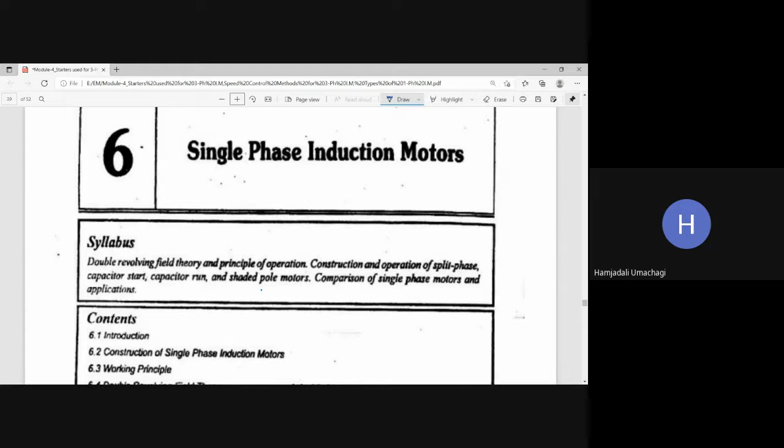Okay, so this is also the same induction motor which is working on the principle of mutual induction only. Instead of three phases it will be having single phase. This is the only difference. And rating wise, application wise, this will be used for small domestic rating applications. Okay, now let us see the things related to single phase induction motor.

So in this class I will just brief out the introduction, construction, working of single phase induction motor, and why it is not self starting, based on double revolving theory, because already I have covered the double revolving theory concept before this. Okay, now let us see the introduction related to single phase induction motor.

For general lighting purpose in shops, offices, houses, schools, etc., single phase AC supply is commonly used. Hence, instead of DC motors, the motors which work on single phase AC supply are popularly in use. These motors are called single phase induction motors. Numerous domestic applications use single phase induction motors. The power rating of such motors is very small.

Some of them are even fractional horsepower motors, which are used in applications like small toys, small fans, hair dryers, etc. This chapter explains the construction, working, and applications of various types of single phase induction motors. So, usually, wherever you take domestic applications like schools, offices, colleges, there we are going to make use of single phase AC supply.

And since single phase AC supply is easily available, instead of making use of DC motors, we are going to make use of AC motors, that too of single phase. So if the induction motor is made to operate on single phase AC supply, then that type of AC motor we call a single phase induction motor.

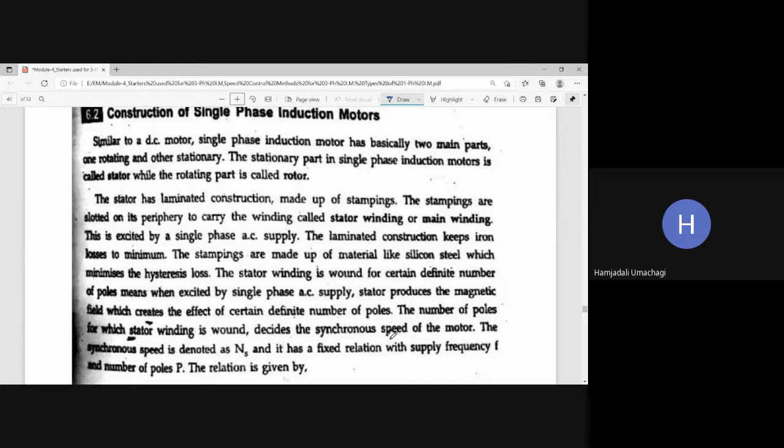Because of that, based on that only we can judge the speed, that is nothing but the synchronous speed of the single phase induction motor. The synchronous speed is denoted as Ns, and it has a fixed relation with supply frequency and number of poles. So based on the number of stator poles, we can decide the synchronous speed of the single phase induction motor, given by the formula Ns = 120f/P rpm. This is already known to you.

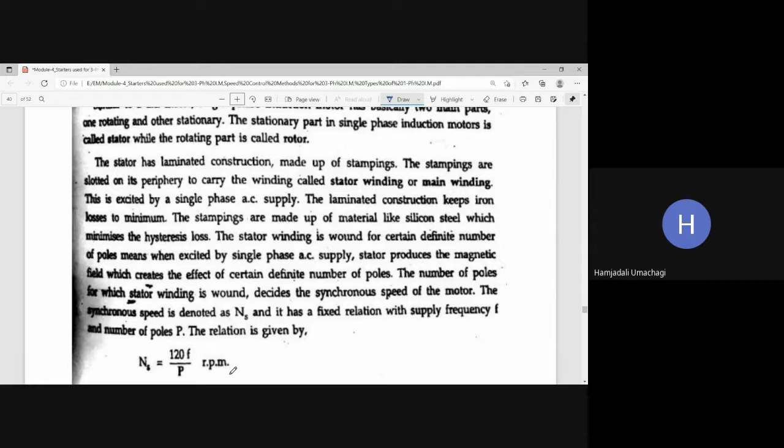Okay, the induction motor never rotates with synchronous speed, but rotates at a speed which is slightly less than synchronous speed. This is already known, that this induction motor will never run at a speed equal to the synchronous speed. It will always be running at a speed less than synchronous speed.

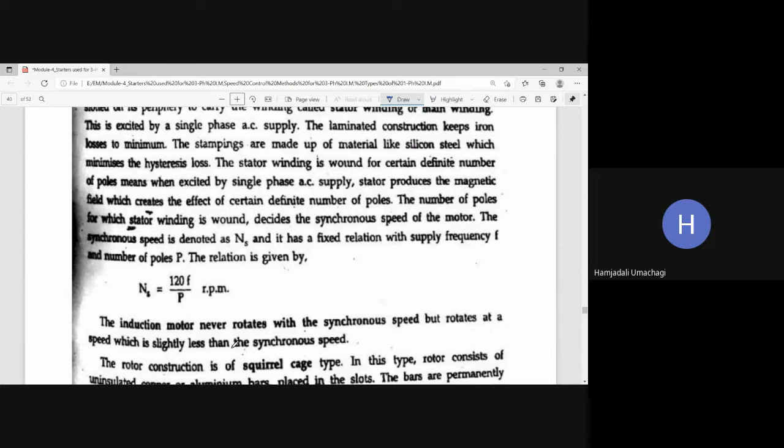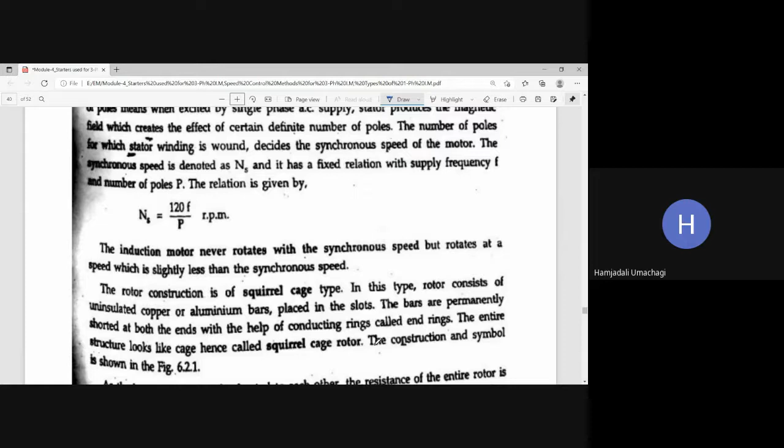Okay, the rotor construction of squirrel cage type. In this type, the rotor consists of uninsulated copper or aluminum bars placed in the slots. These bars are permanently shorted at both ends with the help of conducting rings. They are called end rings. The entire structure looks like a cage, hence it is called squirrel cage rotor. The construction and symbol for this is shown in figure 6.2.1.

As the bars are permanently shorted to each other, the resistance of the entire rotor is very, very small. The air gap between the stator and rotor is kept uniform and as small as possible. The main feature of this rotor is that it automatically adjusts itself for the same number of poles as that of the stator winding.

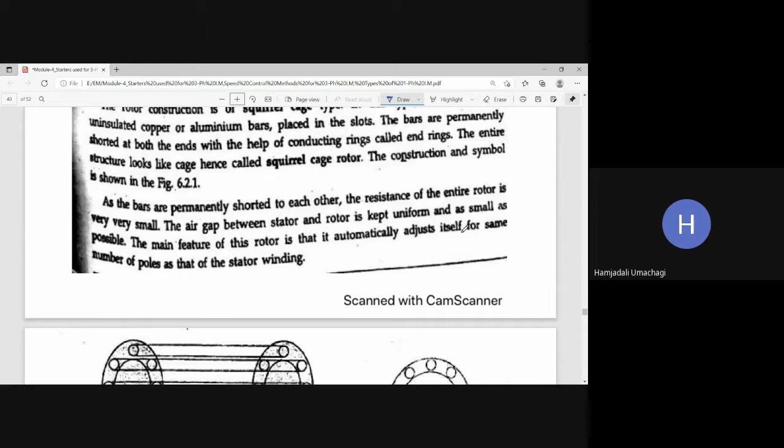So here, the stator is having the stator poles and it is going to carry the main winding, to which we give the power supply to get the stator flux. Coming to the rotor part, the rotor here is made up of a construction like a squirrel cage. This rotor is having uninsulated copper or aluminum bars, and on both sides it is shorted by the conducting end rings, and this structure looks like the cage of a squirrel. Because of that, we call this a squirrel cage induction motor.

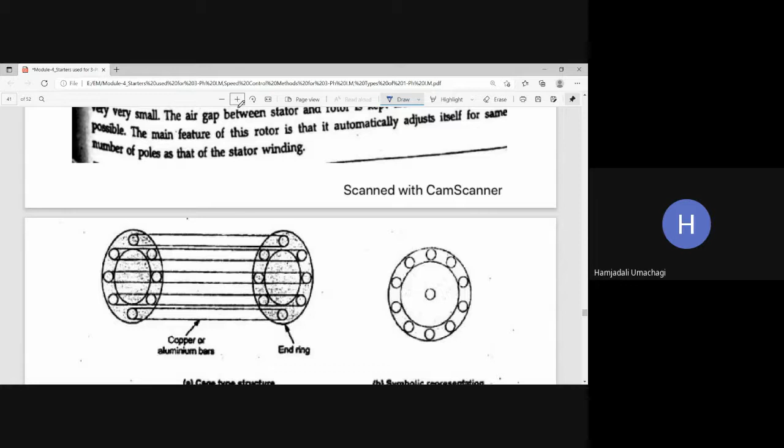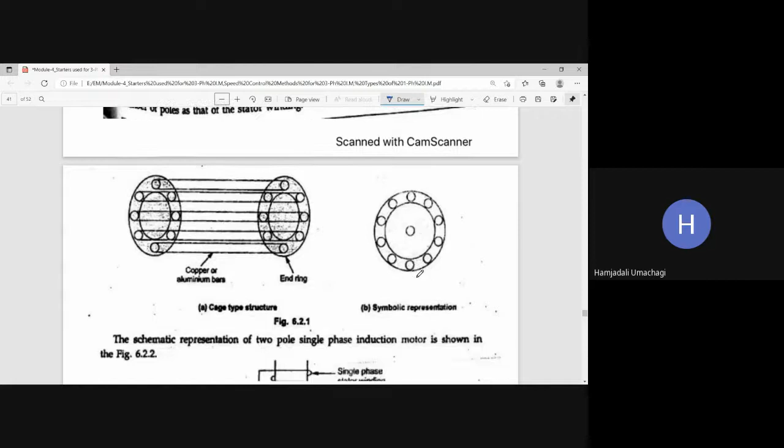Okay, so this is the rotor of the squirrel cage induction motor, and this is the symbolic representation of the squirrel cage rotor. Then the schematic representation of the two-pole single-phase induction motor is as shown in figure 6.2.2. So this is the schematic representation of the two-pole single-phase induction motor.

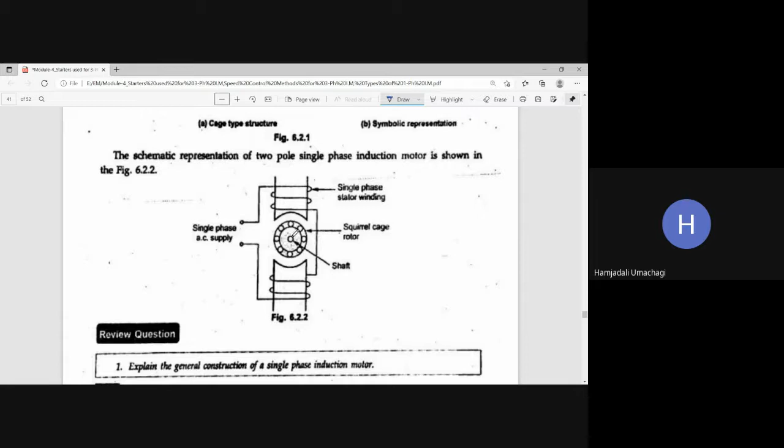So this is the stator having two poles onto which we are going to wind the single-phase stator winding, that is the main winding, and this is the rotor, that is squirrel cage, and this is the shaft. So this is the schematic representation of the single-phase squirrel cage induction motor. Okay, so this is all about construction of the single phase induction motor.

Now let us see the working principle, how the single phase induction motor is working. For the motoring action, there must be two fluxes which interact with each other to produce the torque. So always, if we want motor action, there should be rotation. So to get the rotation, what should be there? There should be two fluxes.

One flux is because of the stator winding, the other flux because of the rotor winding. When these two fluxes interact with each other, the torque will be in one particular direction. It will be unidirectional, and based on that direction the induction motor will be rotating. Okay, this is the well-known concept. Now let us see the working principle for the single phase induction motor. For the motoring action, there must exist two fluxes which interact with each other to produce the torque.

In DC motors, the field winding produces the main flux, while the DC supply given to the armature is responsible to produce armature flux. If you take DC motors, they will be having two windings. The field winding is going to produce main flux, while when DC supply is given to the armature, it is going to produce the armature flux. So this armature flux and main flux both will interact with each other to produce the torque in the case of a DC motor. Because of that, the DC motor will start to rotate in one particular direction, either clockwise or anti-clockwise.

Okay, but in the case of the single phase induction motor, single phase AC supply is given to the stator winding. The stator winding carries an alternating current which produces a flux which is also alternating in nature.

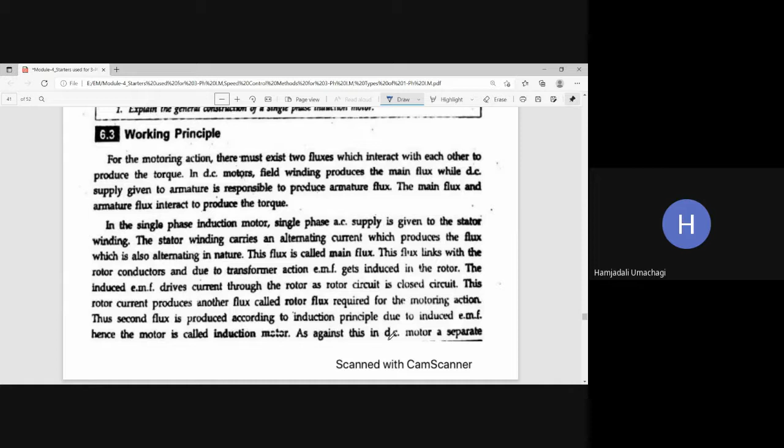So this second flux, the rotor flux, is produced because of the induction principle, from the stator, to the air gap, then to the rotor. The EMF is induced. Because of that induction, this single phase AC machine is called an induction motor. As against this, in a DC motor, a separate supply is required to the armature to produce the armature flux. So if you consider a DC motor, we have to give a separate supply to the armature winding for producing the armature flux, but it is not so in the case of the AC single phase induction motor.

So whatever flux is generated in the stator, via the air gap, it is going to link with the rotor. Because of the transformer action, rotor EMF will be induced. As the circuit is closed, rotor current will start to flow, then rotor flux is available. So this all happens because of the mutual induction process. Because of that, this is called a single phase induction motor. Okay.

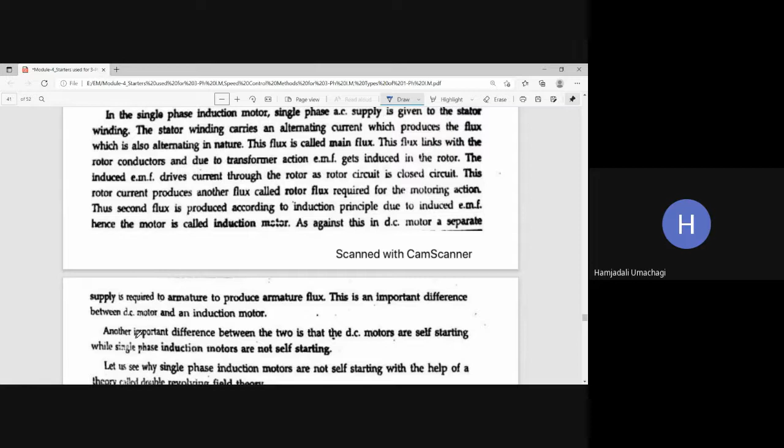Another important difference between the two is that DC motors are self-starting while single-phase induction motors are not self-starting. So DC motors are self-starting, but this single phase induction motor is not self-starting. Why is it not self-starting? Already I have explained you based on the double revolving field theory. What does this double revolving field theory suggest?

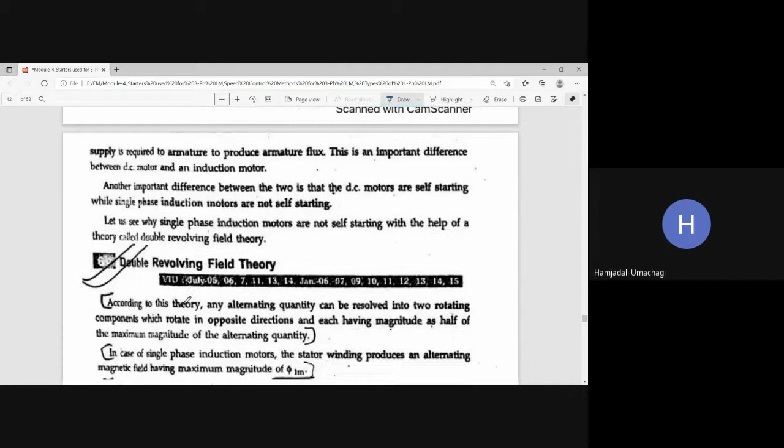This double revolving field theory suggests that the stator flux, whatever we are getting in the beginning in the stator winding, that is the main flux, is alternating in nature. Because of this alternating nature, the main flux is divided into two components: one component in the forward direction, that is phi f, and another component in the backward direction, that is phi b.

And now these two components, which have equal magnitude but opposite direction, because of the transformer action or mutual induction, are going to produce one more flux in the rotor. And now these two fluxes interact with each other and they are going to produce the torque. But see that the rotor is not rotating.

Why? Because the net torque experienced by the rotor is zero, because the flux produced by the stator has two components, one in the forward direction, the other in the backward direction, with equal magnitude and opposite direction. Because of that, the net torque experienced by the motor is zero at the time of starting. Because of that, the induction motor fails to run on its own at the time of starting.

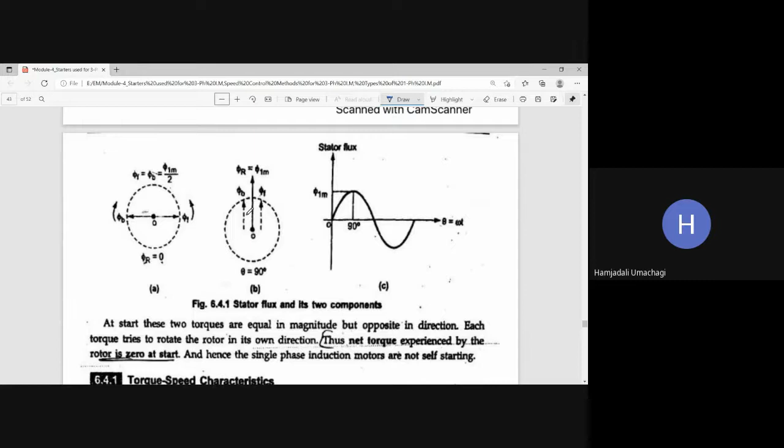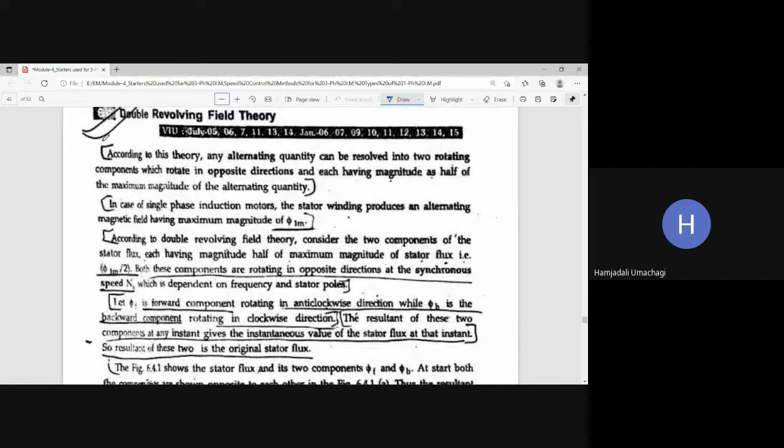So this is all we have seen in previous classes, where I have explained double revolving field theory. This double revolving field theory is going to be asked repeatedly in the final VTU exam. It is one of the important questions they may ask in the final VTU exam. And I have also told you what all things you are supposed to write: all this theory part, then all this flux distribution, then these diagrams, then this torque speed characteristics.

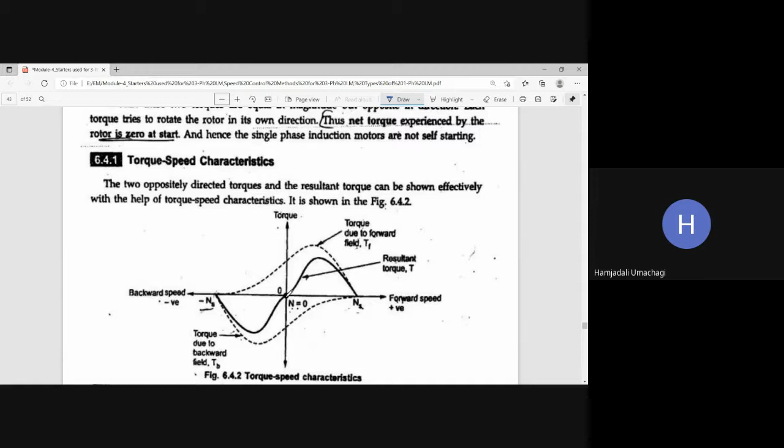All these things explain why single phase induction motors are not self starting. If you see this torque speed characteristics, this is the torque because of the forward component, and this is the torque because of the backward component, and the resultant torque at the origin is zero. Because of that, the net torque experienced by the motor is zero, so there is no force for the rotation of the motor. If there is no force, the motor fails to run. So the net torque experienced by the induction motor at the time of starting is zero.

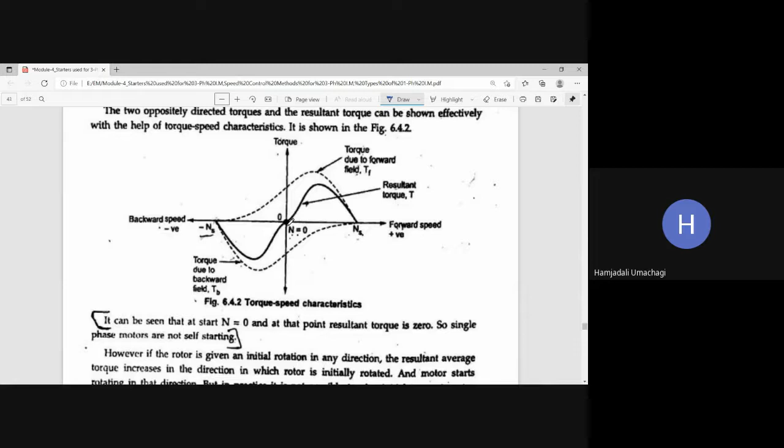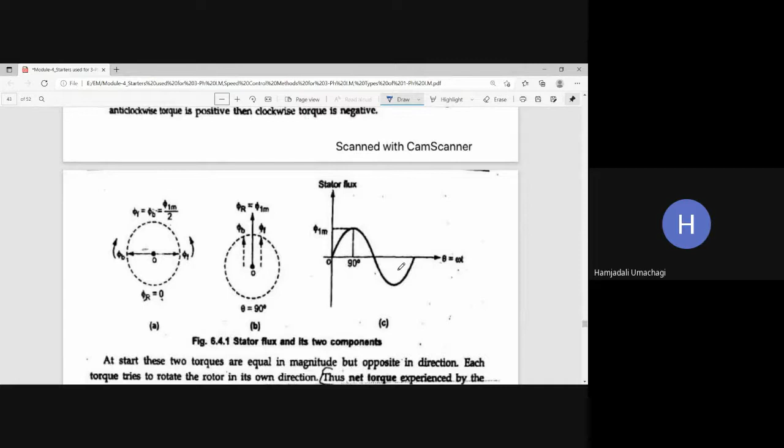The stator flux is divided into two components, one acting in the forward direction, the other acting in the backward direction. Both are equal and opposite, and alternating in nature. Now this alternating stator flux we are going to make rotating in nature. To convert from alternating to rotating, there are different techniques we are going to see, and based on that conversion there are different types of single phase induction motor. Now let us see.

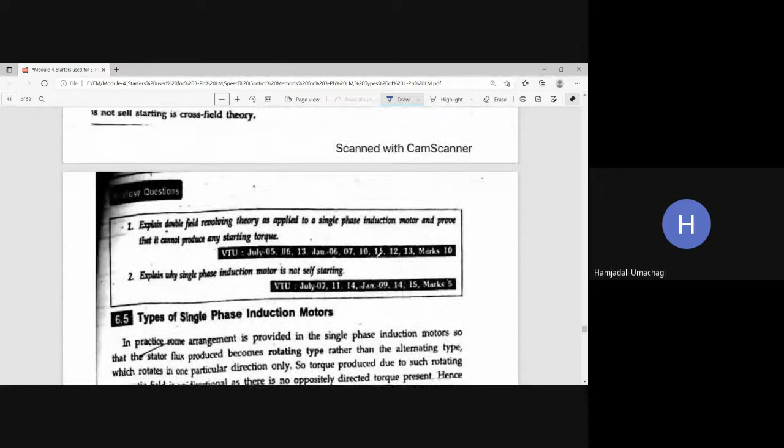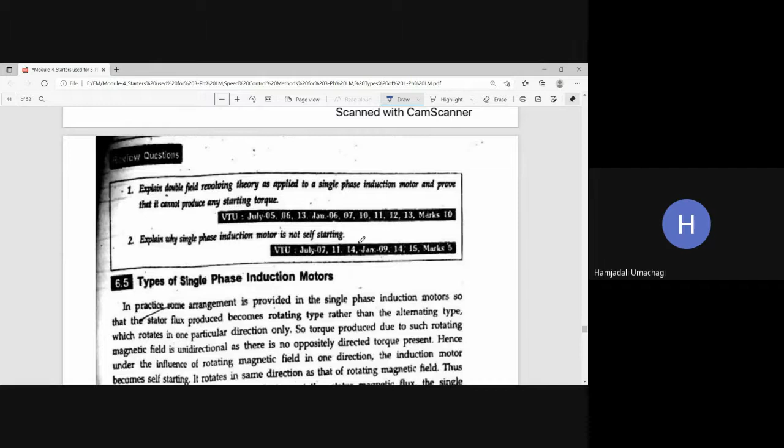So this is the question they may ask: why single phase induction motor is not self starting, or a question based on double revolving field theory. You can see how many times this question has been asked. Okay, now let us see the different types of single phase induction motor.

Types of single phase induction motor. In practice, some arrangement is provided in the single phase induction motor so that the stator flux produced becomes rotating type rather than alternating type. Since the stator flux is alternating type, single phase induction motors are not self starting, so we need to convert this alternating stator flux to rotating type. So some modifications from the design point of view we have to do, so that it rotates in one particular direction only. So torque produced due to such a rotating magnetic field is unidirectional, as there is no oppositely directed torque present.

If we convert the stator flux from alternating to rotating, torque will be only in one particular direction, whereas if it is alternating, half of the component will be in the forward direction and half in the backward direction with equal magnitude and opposite direction. Because of that, net torque will be zero and the motor fails to run. But if it is rotating, it will have unidirectional torque, with no other torque opposing it. So the motor can start on its own in one particular direction if the stator flux is made rotating type.

Hence, under the influence of the rotating magnetic field in one direction, the induction motor becomes self-starting. If the stator flux is converted from alternating to a rotating magnetic field, the induction motor can very easily start on its own. It rotates in the same direction as the rotating magnetic field. Thus, depending upon the methods of producing rotating stator magnetic flux, single phase induction motors are classified.

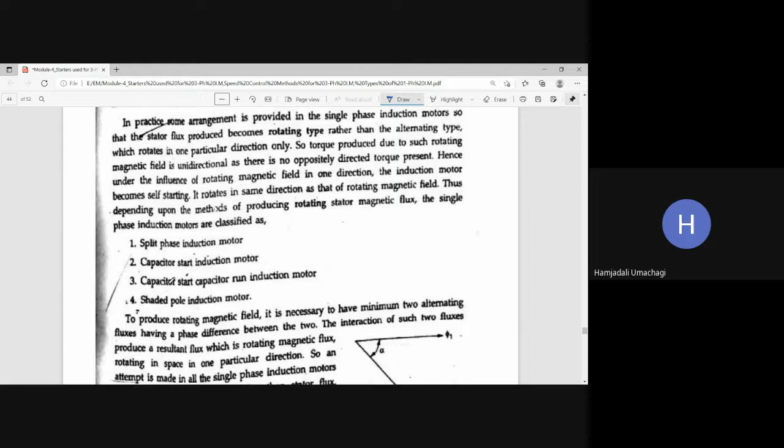Okay, so now you can see here, to produce the rotating magnetic field, it is necessary to have a minimum of two alternating fluxes which have a phase difference between the two. So always we know that for the torque to be there, there should be the interaction of the two fluxes. One flux is stator flux, the other is the rotor flux, and both these two fluxes should have the phase shift. If they have phase shift, then alternating flux can be converted into rotating flux. So how to provide this phase shift alpha?

So providing this phase shift alpha between the two fluxes is what all the different types of single phase induction motors do. So in the main exam, out of the four, any one of the motors will be compulsorily asked for 5 to 6 to 8 marks, like the question: with a neat sketch explain the construction, working, applications, advantages and disadvantages of split phase induction motor, or capacitor start capacitor run induction motor, or shaded pole induction motor. Any of the motors they may ask. So whenever they ask a particular motor, that particular description you are supposed to write in the final VTU exam.

So now for producing the rotating torque, there should be two fluxes having the phase shift of alpha. So how to provide this phase shift alpha between the two fluxes phi 1 and phi 2? Phi 1 means stator flux, phi 2 means rotor flux here. Now let us see the description for this.

Okay, to produce the rotating magnetic field, it is necessary to have a minimum of two alternating fluxes having the phase difference between the two. The interaction of such two fluxes produces a resultant flux which is a rotating magnetic flux. So whenever these two fluxes have a phase shift of alpha, the alternating flux is converted into rotating magnetic flux, rotating in space in one particular direction. So an attempt is made in all the single phase induction motors to produce an additional flux other than stator flux. So here we are going to make some alterations.

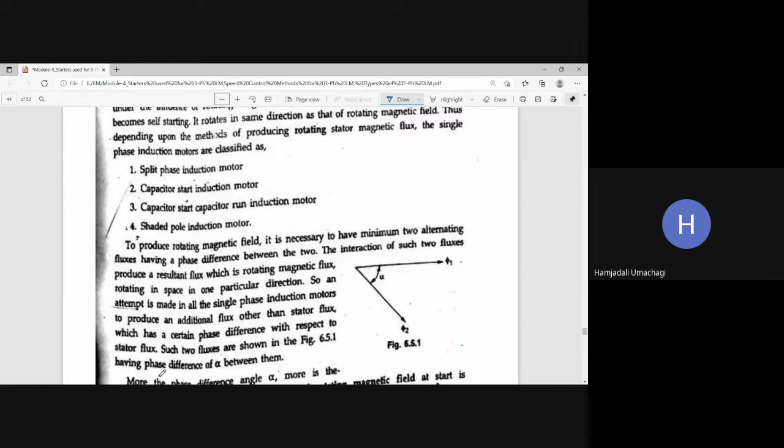So the additional flux is this phi 2, which we are going to provide in the single phase induction motor to make the single phase induction motor start on its own, which has a certain phase difference with respect to the stator flux. Stator flux is phi 1 here. Such two fluxes are shown in figure 6.5.1, having a phase difference of alpha between them. So these are the two fluxes, phi 1 and phi 2. Phi 1 is the stator flux and phi 2 is the additional flux, and in between them the phase shift is angle alpha.

The more the phase angle difference alpha, the more is the starting torque produced. So the more the angle between phi 1 and phi 2, the more will be the starting torque Tst. Thus production of rotating magnetic field at start is important to make the single phase induction motor self starting. So if there is an alpha between the two fluxes, then torque produced will be in one particular direction, and because of that the motor will start on its own. Once the motor starts, the other flux phi 2 may be removed and the motor can continue to rotate under the influence of the stator flux or the main flux alone.

So the very best example of this single phase induction motor is the ceiling fan. In the ceiling fan, if you observe, there is a capacitor connected. That capacitor serves many functions. First, since the ceiling fan is a single phase induction motor, the capacitor is going to improve the power factor. Other than improving the power factor, it makes the ceiling fan start on its own. If there is no capacitor, then the ceiling fan will not start because of alternating flux. So that alternating flux is converted to rotating flux by adding the capacitor, which provides the phase shift alpha.

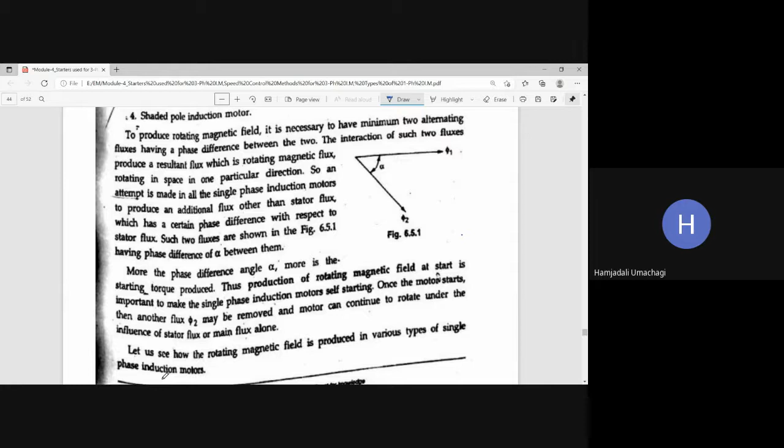Once the motor starts, then another flux phi 2 may be removed and the motor can continue to rotate under the influence of stator or main flux alone. So once the motor starts on its own, then flux phi 2 can be removed. Okay, let us see how the rotating magnetic field is produced in various types of single phase induction motors, how they are made to rotate on their own by producing the rotating magnetic field.

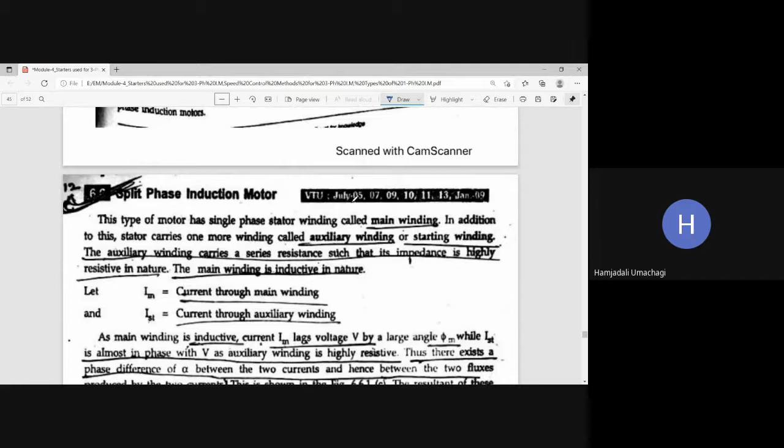So out of the four, the first one is split phase induction motor. This I have already covered in the previous class. This is also one of the important questions. So you can see how many times this question has appeared. The question will be like, with a neat sketch explain the construction and working of split phase induction motor. Then you are supposed to explain all this description here.

So in between Im and Ist, or phi 1 and phi 2, the phase shift angle is alpha, because the starting winding is resistive in nature and the main winding is inductive in nature. Because of this, there exists a phase shift of alpha between Ist and Im. And because of this alpha only, we can convert alternating stator flux to rotating flux. The starting current Ist is resistive in nature, so it is almost in phase with the voltage. This I have already covered in the earlier class.

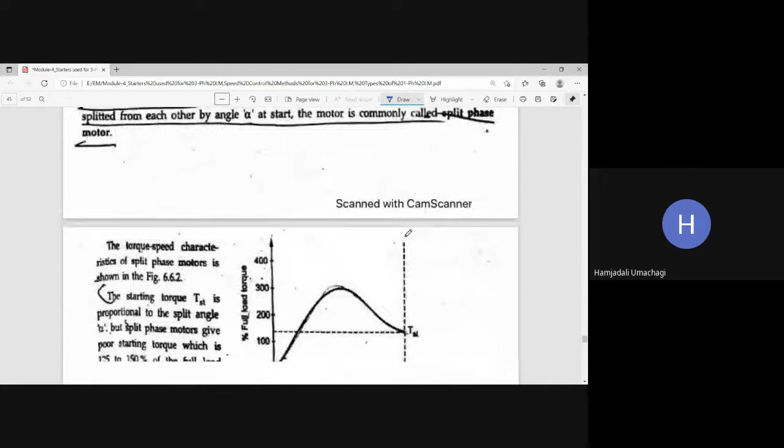So once it starts on its own, the centrifugal switch is opened, then flux phi 2, the flux available because of the starting current, is taken out, and the motor can run very easily once it picks up the speed. So this is all about the split phase induction motor, and the torque versus speed characteristics and the applications. This is the type of question you may get in the final VTU exam. Okay, so now we will see the description for capacitor start induction motor.

A very good example is the ceiling fan, where the ceiling fan is a single phase induction motor and it has a capacitor. The capacitor serves two purposes, as I have told you. One, it improves the power factor of the circuit. Why? Because an induction motor is an inductive load. And also it makes the ceiling fan start on its own. So you can see how many times this question has been asked.

Capacitor start induction motor. Let us see the construction description. This type of motor is similar to the resistance split phase type. The difference is that the capacitor is connected in series with the auxiliary winding. The capacitive circuit draws a leading current. This feature is used in this type to increase the split phase angle between the two currents Im and Ist.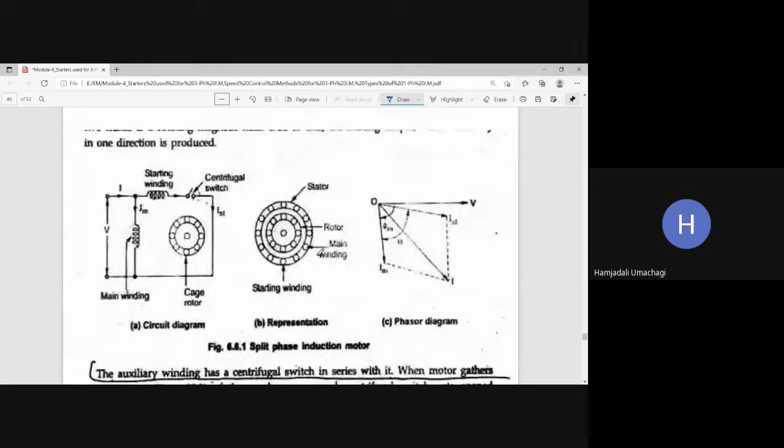So if you see the split phase induction motor here, this split phase induction motor has a resistive starting winding with current Ist, and an inductive main winding, the stator winding. Ist is the current flowing through the starting winding, and the current flowing through the main winding is Im. In between these two there is an angle alpha.

So now further, with the same circuit diagram, if we add one more additional capacitor to the split phase induction motor, then it is called a capacitor start induction motor. We all know that in a capacitor circuit, current always leads the voltage. So now what is the current here? The current in this case is Ist.

Because of that, the current Ist, which was earlier at this position, now leads the voltage. This is the voltage phasor, and now this current Ist gets shifted to here. Because of that, the phase angle between Im and Ist further increases. Alpha further increases in comparison with the normal split phase induction motor.

So this capacitor start induction motor is as good as a split phase induction motor with the only addition of a capacitor in series with the starting winding, and the starting winding is resistive in nature. Because of that, the starting current Ist leads the voltage. Because of the capacitive current, Ist leads the voltage, and the earlier position of Ist at this position now gets shifted to this position.

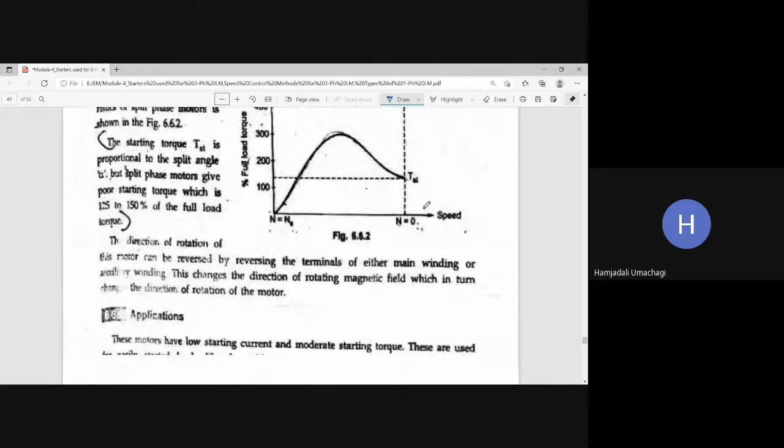Because of that, alpha, which was earlier only this much, has now been improved. Because alpha has increased, torque automatically also increases. The construction of this type of motor is similar to the resistance split phase type. The difference is that the capacitor is connected in series with the auxiliary winding. The capacitor draws the leading current Ist. This feature is used in this type to increase the split phase angle alpha between the two currents, main current Im

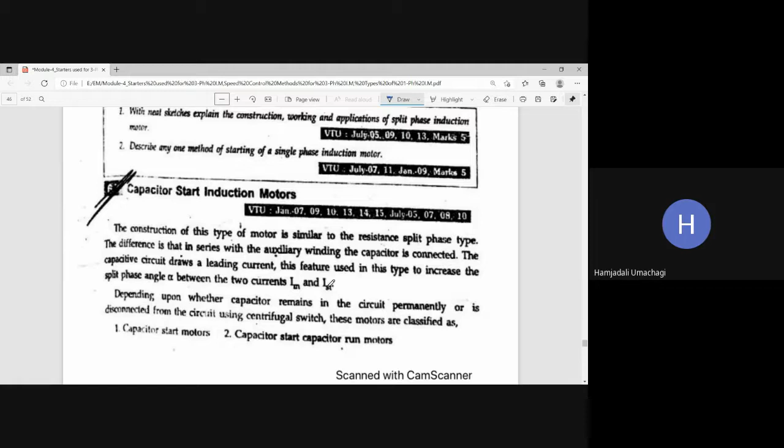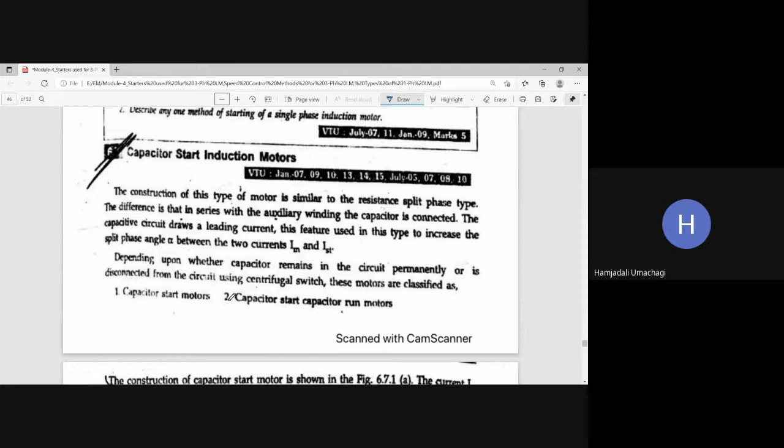and starting current Ist. Depending upon whether the capacitor remains in the circuit permanently or is disconnected from the circuit using the centrifugal switch once the motor picks up speed, these motors are further classified as capacitor start motor and capacitor start capacitor run motor. Now let us see the first one.

So this is the circuit diagram for the capacitor start motor. Everything is the same as the normal split phase induction motor: it has an inductive main winding, that is the stator winding, and a resistive starting winding with starting current Ist. In addition, you have this capacitor, and the centrifugal switch is common. The starting current Ist was earlier at this position, but now it has been shifted so that Ist leads the voltage.

Because of that, the angle alpha between Im and Ist is larger. This is Im, the inductive current flowing through the stator winding, and this is Ist, the current flowing through the resistive starting winding, which, because of the leading current, shifts so that Ist leads the voltage. The angle between Ist and Im is alpha. So here the phase shift has been improved. If the phase shift angle is more, then torque is also more. Because of that, the induction motor will start on its own.

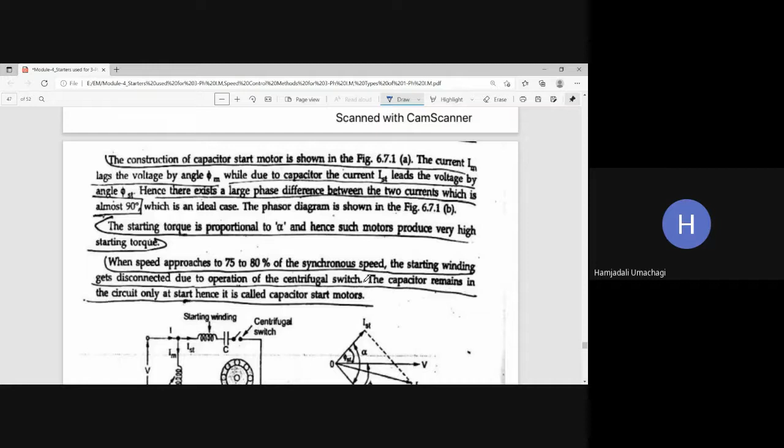The construction of the capacitor start motor is shown in figure 6.7.1a. This figure represents the capacitor start motor, and this is the phasor diagram representing the position of the starting current, main winding current, total current, voltage, and the phase angles alpha, phi st and phi m. The current Im lags the voltage by an angle phi m.

So this current Im is the main winding current flowing through the stator inductive winding, and it lags the supply voltage V. So this main winding current is inductive in nature, and it lags the supply voltage V here by an angle phi m. So the angle between voltage V and Im is this angle phi m.

Similarly, due to the capacitor, the current IST leads the voltage by an angle of phi st. So here the capacitor is connected in the starting winding. Because of that, the current flowing through the capacitor is IST, and it will be a leading current. So current IST is leading the supply voltage V, and the angle between IST and V is phi st. Hence there exists a large phase difference between the two currents, which is almost 90 degrees.

So now if you see the phase shift between IST and IM, that is alpha, it is almost 90 degrees. It is a very large angle, which is an ideal case. The phasor diagram is shown in figure 6.7.1b. This phasor diagram represents the position of IST, total current I, main winding current IM, supply voltage V, phase shift angle alpha, starting power factor angle phi st, and main winding power factor angle phi m.

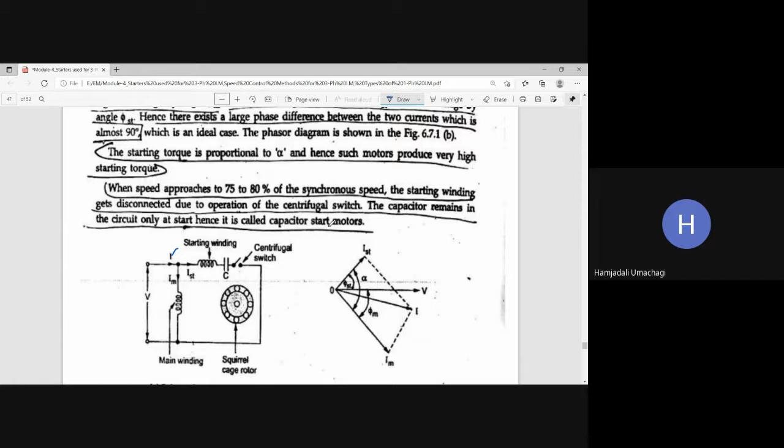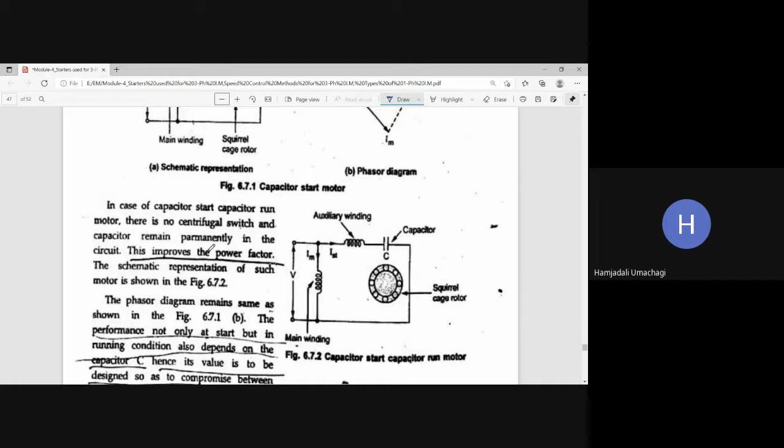Then, capacitor start, capacitor run. Now let us see the capacitor start, capacitor run motor. In this motor there is no centrifugal switch and the capacitor remains permanently in the circuit. So the only difference is that there is no centrifugal switch. The centrifugal switch will not be here; it will be completely shorted.

So there will be a capacitor at the time of starting, as well as in the circuit during normal working condition. Then it is called a capacitor start, capacitor run motor. In this motor there is no centrifugal switch and the capacitor remains permanently in the circuit. This improves the power factor. The schematic representation of the motor is shown in figure 6.7.2.

Figure 6.7.2 indicates the capacitor start, capacitor run motor, where there is an inductive main winding, that is the stator winding, and the resistive auxiliary winding in series with the capacitor. You can observe that the centrifugal switch is absent, so there is no provision to disconnect the capacitor. It means the capacitor is included at the time of starting as well as during normal running. The phasor diagram remains the same as shown in figure 6.7.1b.

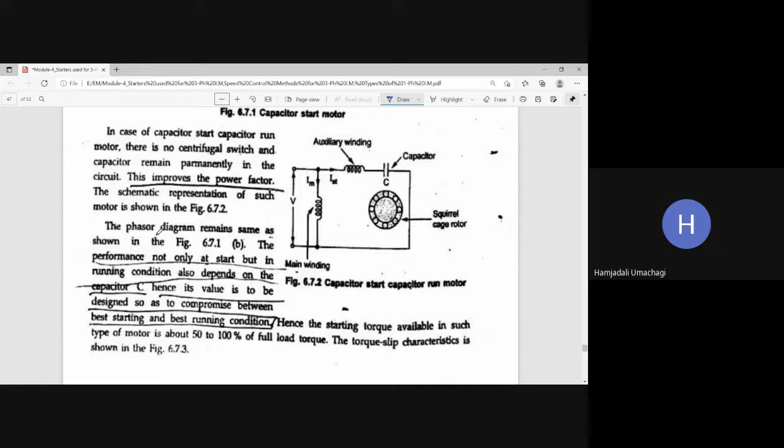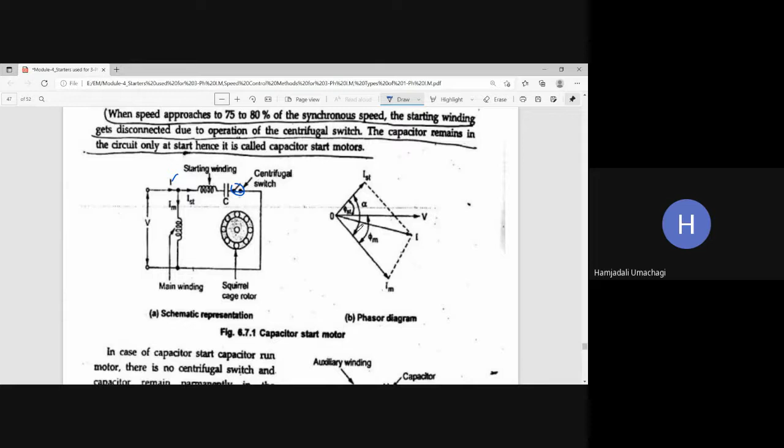So for the capacitor start, capacitor run motor, the same phasor diagram will be there. It will have leading current IST with respect to the voltage with power factor angle phi st, lagging current IM with respect to V with power factor angle phi m, and the total current I. The angle between the starting current and main winding current IM is alpha. So the same phasor diagram applies even for the capacitor start, capacitor run induction motor.

The performance, not only at start but in the running condition also, depends on the capacitor C. Hence its value is to be designed so as to compromise between best start and best running conditions. So the capacitor will be included throughout the running of the induction motor. So we have to select the capacitor of appropriate value so that it can give

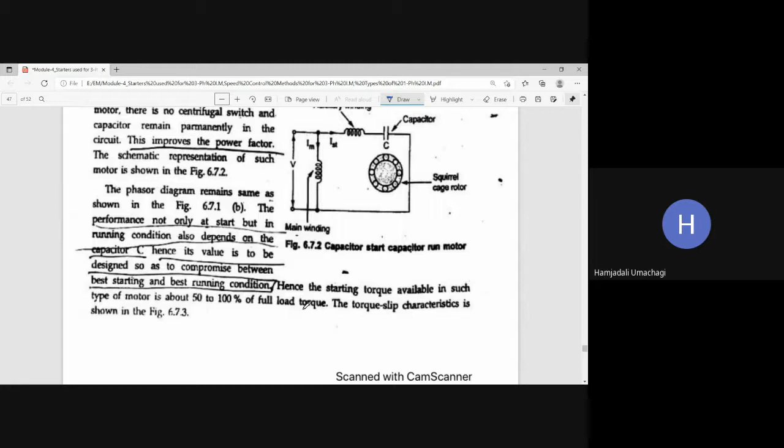best running condition. Hence the starting torque available in such type of motor is about 50 to 100% of full load torque. So here we are going to attain huge torque, that is 50 to 100% of load torque. Then the torque slip characteristics are as shown in figure 6.7.3. So this is the torque speed characteristics for capacitor start induction motor, where the y-axis indicates full load torque and the x-axis indicates speed. So this is the full load torque versus speed characteristics.

The first curve is for capacitor start motor, and this is for capacitor start capacitor run motor. So this is the starting torque for capacitor start motor, and this is the starting torque for capacitor start capacitor run motor. For the capacitor start induction motor, the starting torque is in the range of 350 to 400%, and similarly for the capacitor start capacitor run, the starting torque is in the range of 150 to 200%.

Okay, the direction of rotation in both types can be changed by interchanging the connections of the main winding or auxiliary winding. Suppose you want to change the direction of the single phase induction motor of capacitor type, then we can interchange the connections of either the main winding or auxiliary winding. Because of that, the flux will rotate in the opposite direction, and the direction of the induction motor will change.

Okay, the capacitor permanently in the circuit improves the power factor. These motors are more costly than split phase type. So here in this case, the capacitor will be remaining permanently. Because of that, power factor will be increased, and also the cost will be more in comparison with the split phase type induction motor.

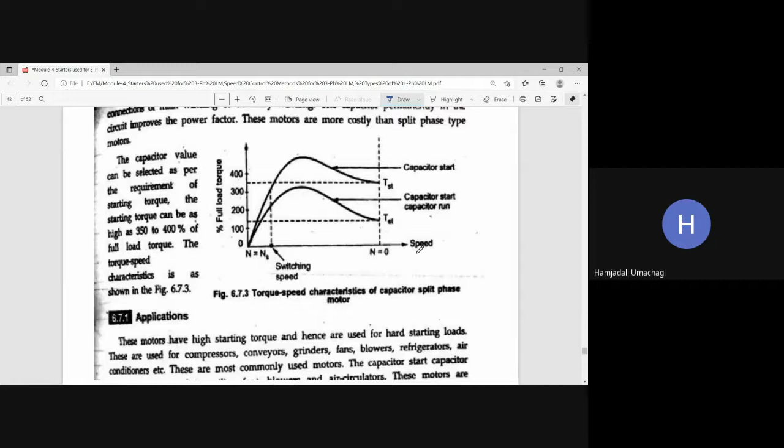Then let us see the applications now. Capacitor start induction motors have high starting torque, and hence are used for hard starting loads. The loads which require high torque, there we can make use of this kind of motor. Okay, these are used for compressors.

These are used for compressors, conveyors, grinders, fans, blowers, refrigerators, air conditioners, etc. These are the most commonly used motors. The capacitor start capacitor run motors are used in ceiling fans, blowers, and air circulators. These motors are available up to 6 kilowatts. So these are the applications and rating of the capacitor start induction motor.

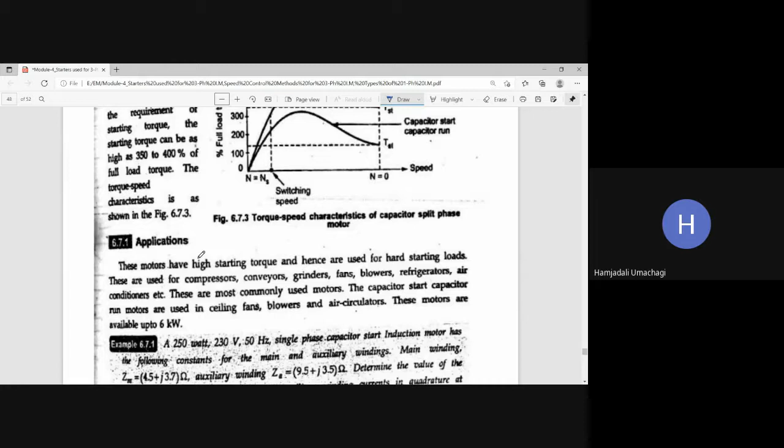Okay, after this, now let us see the numerical problems on the capacitor start induction motor. Now let us see the first problem here. This is a question paper numerical problem. You can see the problem statement.

A 250 watt, 230 volt, 50 hertz single phase capacitor start induction motor has the following constants for the main and auxiliary winding. Main winding means inductive winding, auxiliary winding means resistive winding. The main winding has impedance Zm equal to 4.5 + j3.7 ohms, and the auxiliary winding has impedance Za equal to 9.5 + j3.5 ohms.

Then determine the value of the capacitor that will place the main and auxiliary winding currents in quadrature at starting. So here we have to find out what should be the value of the capacitor, so that the main and auxiliary winding currents, that is Ist and Im, will be in quadrature, meaning exactly 90 degrees. Okay, now let us see the solution for this.

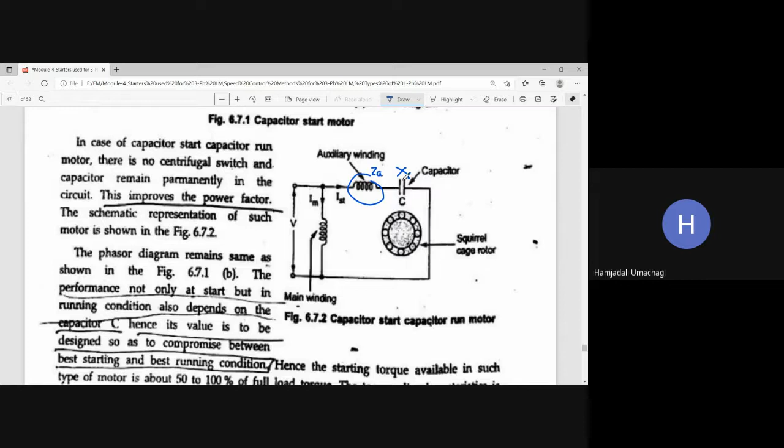Let Xc be the reactance of the capacitor connected to the auxiliary winding. So the auxiliary winding will have the capacitor, and its reactance is Xc. The impedance of the auxiliary winding Za is 9.5 plus j3.5 ohms. You can see here, this is the impedance of the auxiliary winding. Along with it, in series, there is a capacitor with reactance Xc. So we should add both of these: Za plus Xc.

So Za is already given as 9.5 plus j3.5 ohm, and in series with that there is a capacitor. So Za is equal to 9.5 plus j3.5 minus jXc, that is equal to 9.5 minus jX, where Zm is given as 4.5 plus j3.7 ohms. Convert this rectangular to polar form, so the magnitude will be 5.8258 at an angle of 39.42 degrees. And Im is the inductive main stator winding current, lagging the voltage by an angle of 39.42.

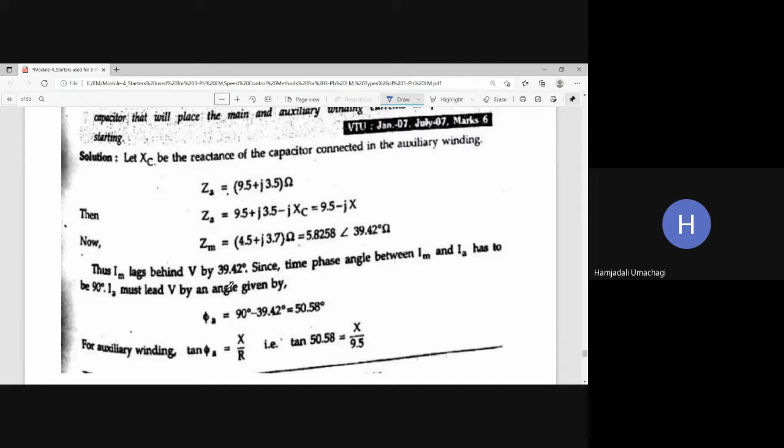Since the time phase angle between Im, the main winding current, and the auxiliary winding current Ia has to be 90 degrees, quadrature, this is the condition given. So Ia must lead the voltage by an angle given by this. The angle between the main winding current and the auxiliary winding current Ist, that is alpha, should be exactly 90 degrees. If this has to be 90 degrees, what should be the value of C? This is what you are supposed to calculate.

Okay. So we have already calculated the angle between voltage V and Im, which is 39.42. Then how much should the rest of the angle be? 90 minus 39.42. So 39.42 is the angle between V and Im, and the rest, 90 minus 39.42, will be the top angle, that is phi st, which we are going to calculate now.

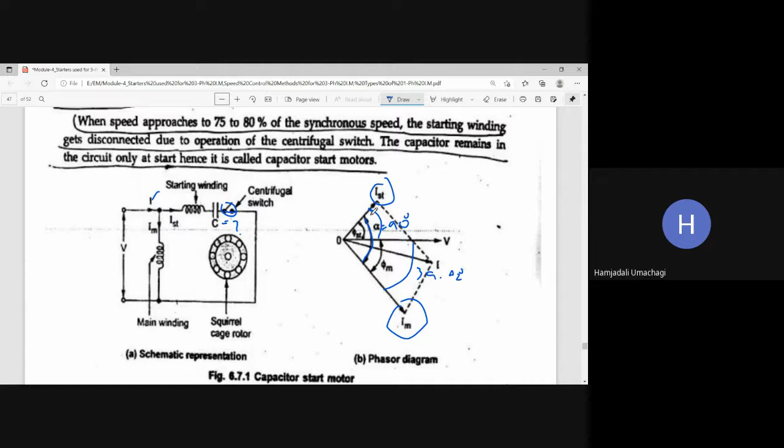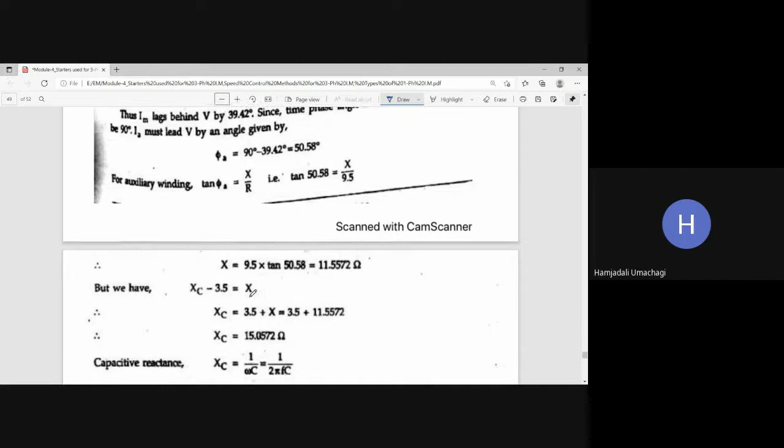So thus Im lags behind V by 39.42 degrees. Since the time phase angle between Im and Ia has to be 90 degrees, Ia must lead V by an angle phi a equal to 90 minus 39.42, so the top angle will be 50.58 degrees. Then for the auxiliary winding, tan phi a is equal to X by R, reactance to resistance, where phi a is 50.58, equal to X by 9.5. Solving, X is equal to 9.5 into tan 50.58, so X will be 11.5572.

Okay, but we have Xc minus 3.5, which is already given. So Xc minus 3.5 is equal to X. Therefore the reactance of the capacitor Xc is equal to 3.5 plus X, where X is 11.5572. So the reactance of the capacitor Xc is 15.0572 ohms. This is the capacitive reactance, and Xc is equal to 1 upon omega C, that is 1 upon 2 pi f C.

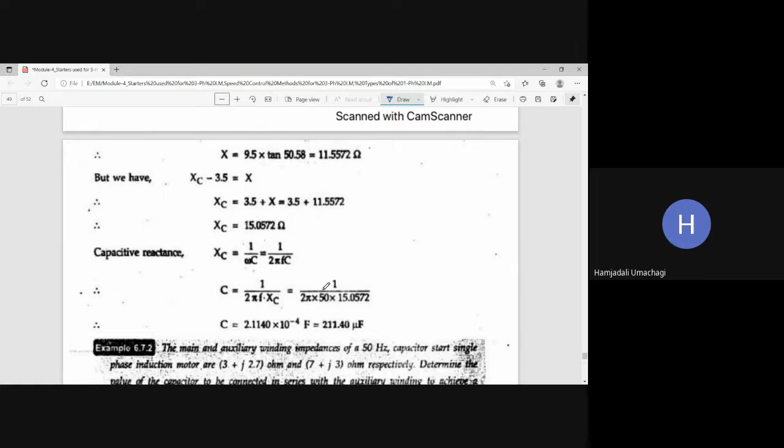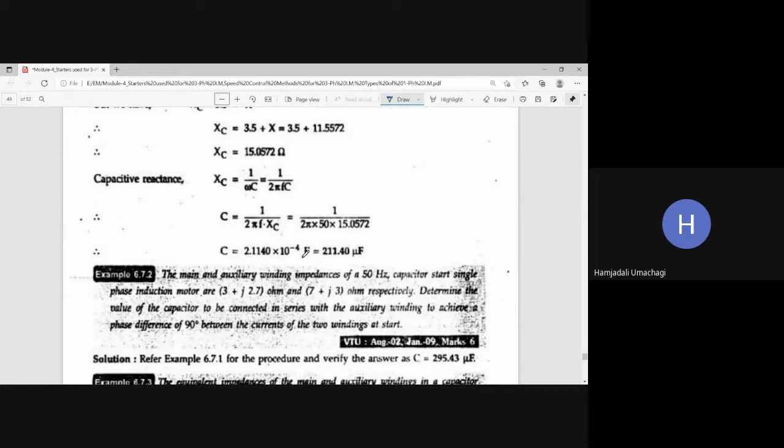From this, to calculate the capacitance, C is equal to 1 upon 2 pi f into Xc, with frequency f of 50 hertz and Xc of 15.0572. Solving, the capacitor value will be 2.1140 into 10 raised to minus 4 farad, or 211.40 microfarad. So this is the value of the capacitor needed to keep the angle alpha between Ist and Im at 90 degrees.

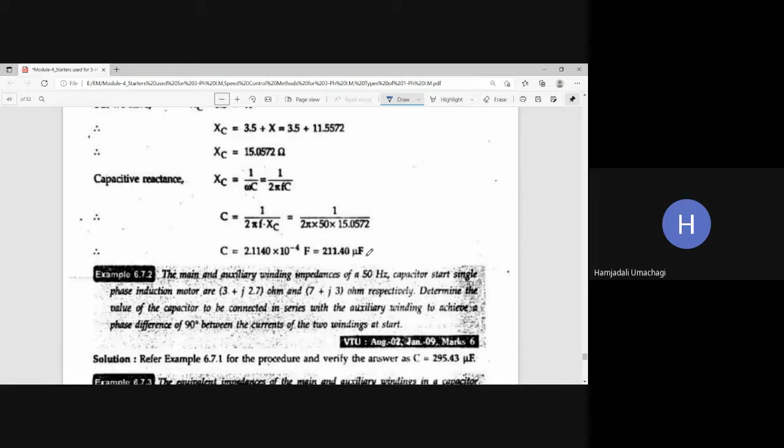If I want that angle alpha to be 90 degrees, then the value of the capacitor should be 211.40 microfarad. Okay. So this is the kind of problem you can get from the capacitor start induction motor. Similarly, let us solve one more problem.

You can solve this problem based on the earlier method only. So this problem you can take it as homework. For this problem, you can refer to the same previous problem methodology. Okay, now we will take one more problem.

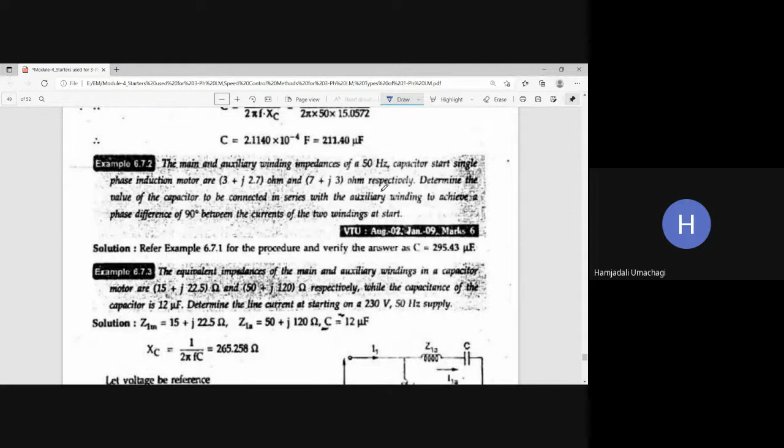If you want this problem statement, I will wait for some more time here so that you can note it down. Okay, and then we will move to the next problem. For this problem solution, you can just follow the same steps that I have covered in the previous problem. Okay, then we will move to the next problem here.

The problem statement is: the equivalent impedances of the main and the auxiliary windings in a capacitor motor are 15 plus j22.5 ohms and 50 plus j120 ohms respectively, while the capacitance of the capacitor is 12 microfarad. Determine the line current at starting on a 230 volt 50 hertz supply. So here they have already given the main winding impedance, that is Z1M is 15 plus j22.5 ohm, and the auxiliary winding impedance is 50 plus j120 ohms, and the value of the capacitor connected is 12 microfarad. So here we should calculate the line current at starting.

Okay, so XC, we know, is 1 upon 2 pi fC. So with that, if I want to calculate XC, substitute the C value as 12 microfarad, then you will be getting reactance XC value as 265.258 ohms. So now this is a circuit diagram.

I1 is the current, that is the line current, which is flowing through the capacitor start induction motor. This is the starting winding or the auxiliary winding, and this is the main winding. Current through the auxiliary or the starting winding is I1A, and current through the main winding is I1M. And this is the capacitor, and this is the input supply voltage, 230 single phase.

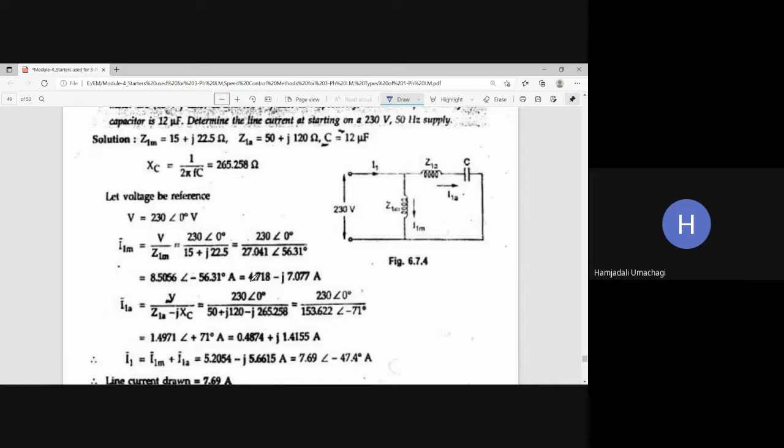Okay, now let voltage V be the reference, having voltage V equal to 230 at an angle of 0 degree. Then I1M is the current flowing through the main winding. I1M is equal to V by Z1M. V is 230 at an angle of 0, and Z1M is 15 plus j22.5. So convert this rectangular to the polar form, and if you solve it, it will have in the polar form a magnitude of 8.5056 at an angle of minus 56.31. This means this is the inductive current, which is lagging the voltage by an angle of 56.31 degree. And in the rectangular form, this is the real and imaginary part.

Similarly, you calculate the auxiliary winding current I1A. I1A is given by V divided by Z1A minus jXC. V is 230 at an angle of 0, and Z1A is 50 plus j120. This is already given, and XC we have already calculated as 265.258. So substitute all the values, convert from rectangular to the polar form, and if you solve it, you will get the polar form value, where the magnitude is 1.497 at an angle of 71 degree, which means it is a leading current with respect to the voltage because of the capacitor. In rectangular form it is 0.4874 plus j1.4155 ampere.

So now if I want to calculate the starting current, if you apply KCL at this point, I1 is equal to I1M plus I1A. So the vector sum of I1M plus I1A is the starting line current I1. Add these two currents, I1M and I1A, then I am going to get I1. Since the operation is addition here, consider the rectangular form of I1M, that is 4.718 minus j7.077, plus the rectangular form of I1A, that is 0.4874 plus j1.4155.

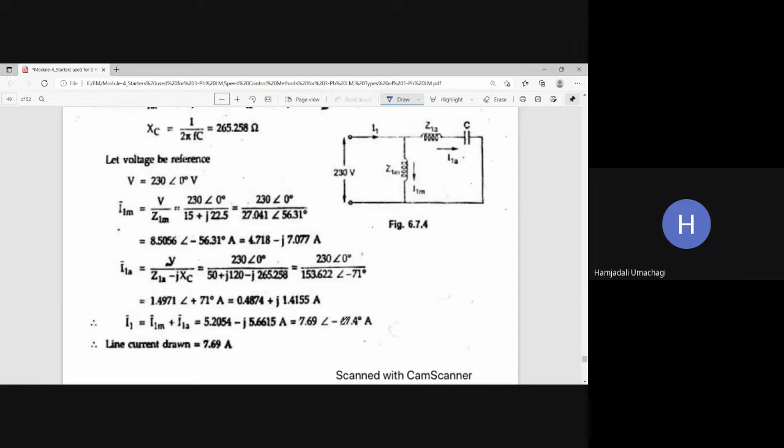So if you solve, the starting line current magnitude in polar form is 7.69 at an angle of minus 47.4 degree. It means that this current is lagging the voltage, because the minus sign indicates it is a lagging current. So this is all about numerical problems on capacitor start induction motors. These are the kind of questions you can get in the final VTU exam. Okay, so you can study all these topics.